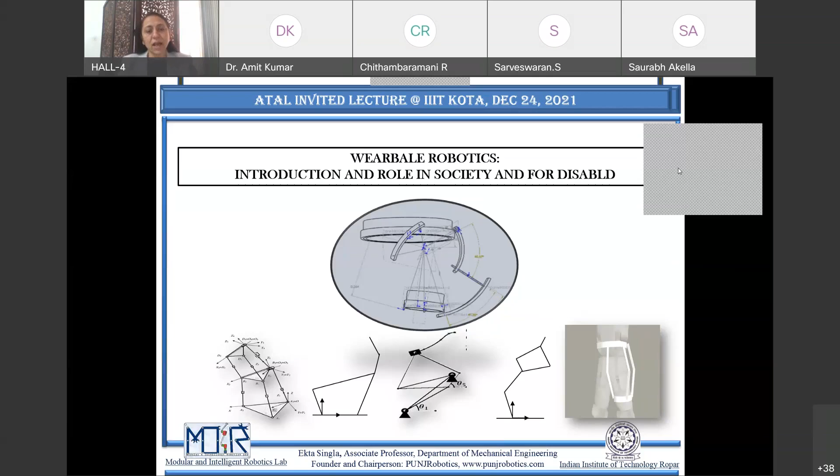I'll be presenting from the mechanical perspective, like mechanisms, etc. Before going into wearable robotics, I'll be introducing how it is helpful, and the different types of exoskeletons, because I'll be speaking about exoskeletons more. Before that, just to introduce my work, so you should see it's not that I work only for this, whatever your expertise is.

yes. Was there any point for me?

I think the organizers can mute or let me know if there is any remark for me. Okay, let me move forward. Yes, Amit Kumar, here. We are trying to manage the audience and will mute if somebody accidentally unmutes. My point is, I always wait because sometimes I think I'm not audible. If there'll be anything missing from my end, I'll wait for Dr. Amit's remark so I know if it's for me. If there's any disturbance, it's all right. I just wait because there's no point moving further if it's not audible.

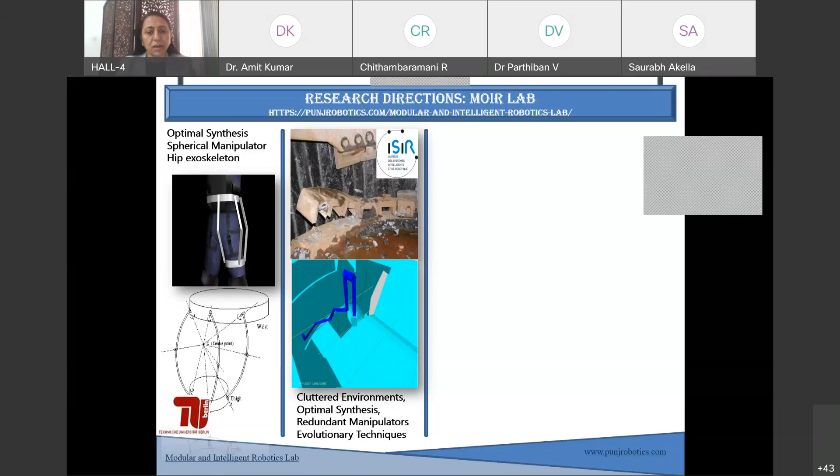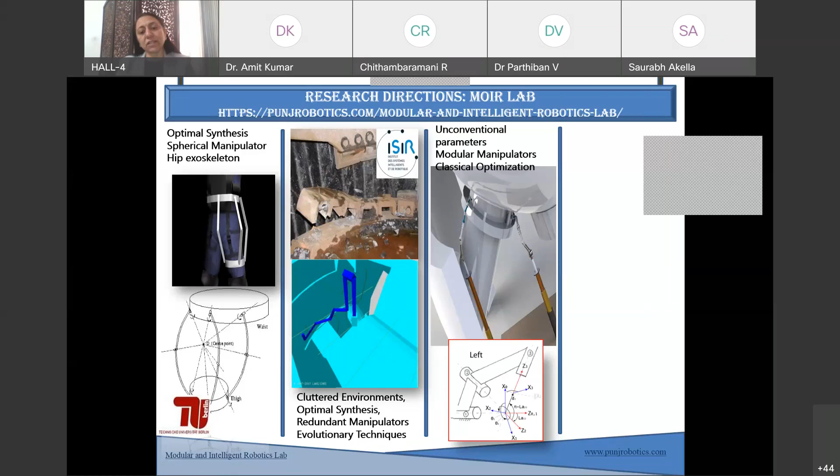And then unconventional parameters - this is in the last decade. One of the major areas of my working is modular robots, meaning modularity is being utilized so that we can give customized robots. There can be development of a modular library, which I'll also talk about in my present lecture. This library we developed has two versions ready for industrial purposes, for maintenance and service robots, etc. So you'll notice that my expertise is related to task-oriented designs, optimal synthesis, collision avoidance, cluttered environments, unconventional parameters, and reconfigurability, or you can say modularity.

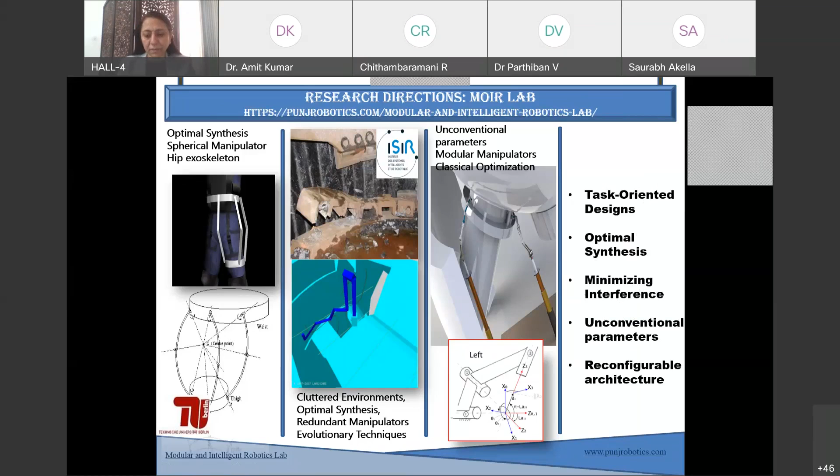These are some pictures from my other works. As I said, one of my major areas in the last decade is modular robots. Those who work with robotic arms understand there are various configurations we work with. If you procure a configuration for a particular type of task once, it won't be cost effective if the work is non-repetitive or just for maintenance - you cannot purchase one robotic system for every new type of application. So we are working on modular designs which can change their configuration.

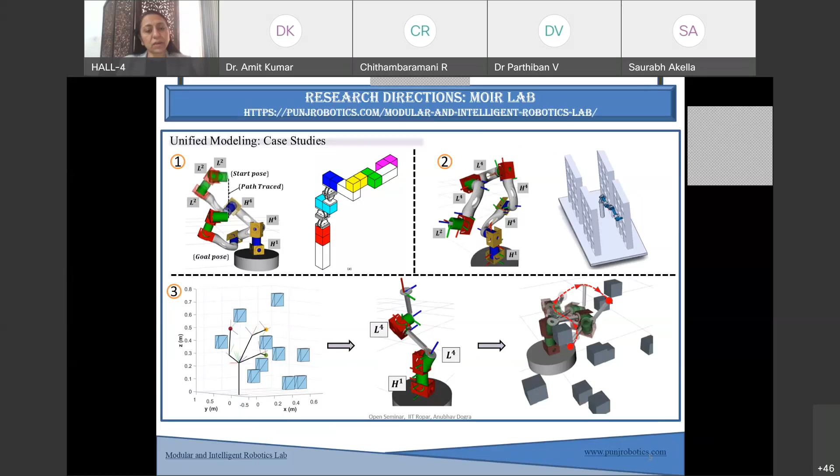So this is just some glimpse of other works. Moir is my lab, which I've mentioned here - it's actually the Modular and Intelligent Robotics lab at IIT Ropar. You'll notice this is the kind of library; this is actually Moir. We call it Mark II - Mark I was prepared earlier, now it's a bit more advanced. Next we have a project for Mark 3, which will be for medical system applications, but this wasn't for application.

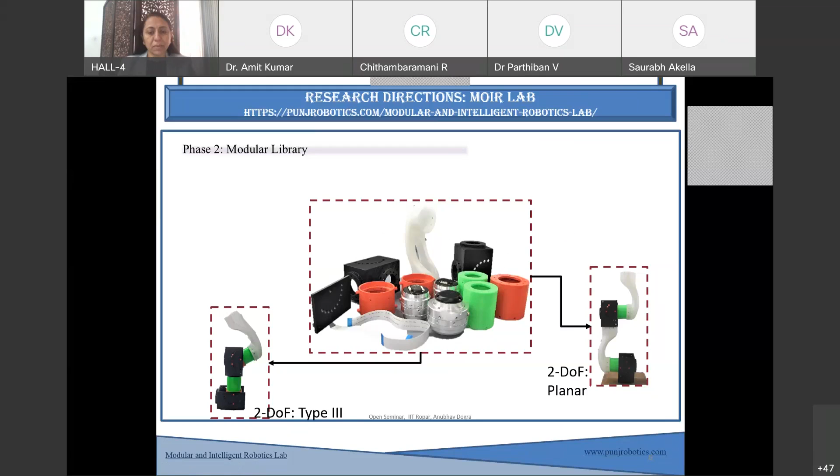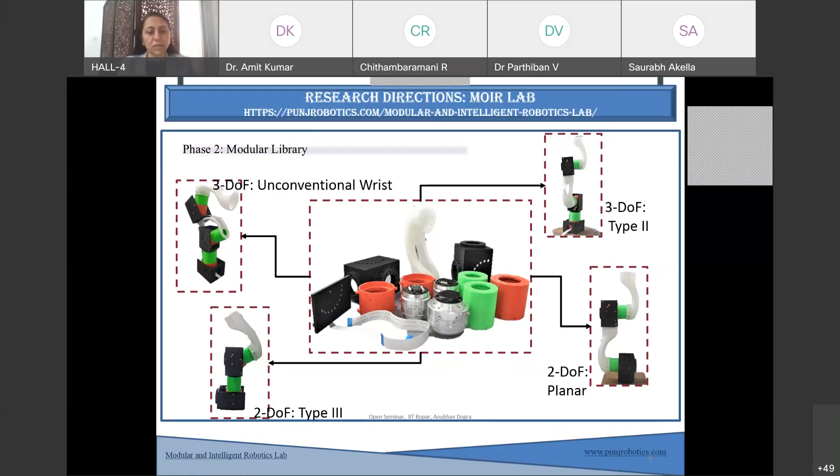This is majorly, as a laboratory concept, about how this library can be used for different configurations and what that means. I'm not making that part of today's lecture, but you'll notice how this new concept has taken its journey. If you want planar robots, or say a twist or a wrist, a spherical system is being developed. Similarly, another spatial configuration - different types of configurations can be developed.

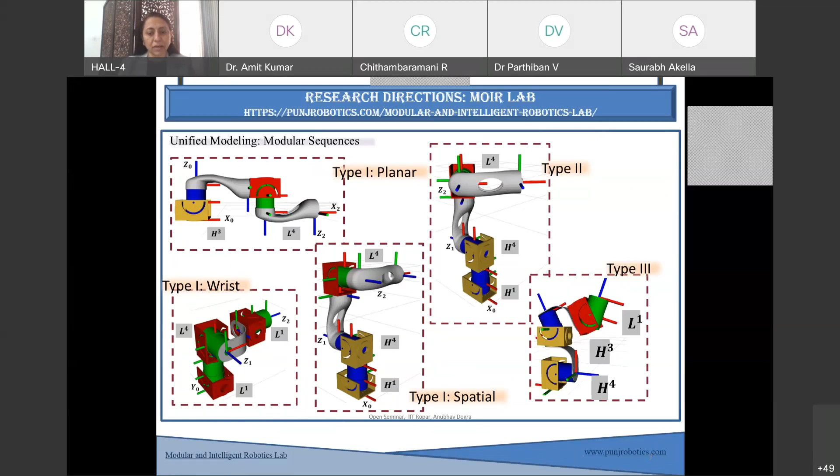So this was all either through simulations or through proof of concept given through the prototype which I showed you, developed in my lab over the last half decade. Now let us start with exoskeletons, because this was just to let you know it's not only about wearable robots, but whatever robotic systems or applications we get, we try to implement our expertise in that. If I may now share with you, this lecture will have two parts.

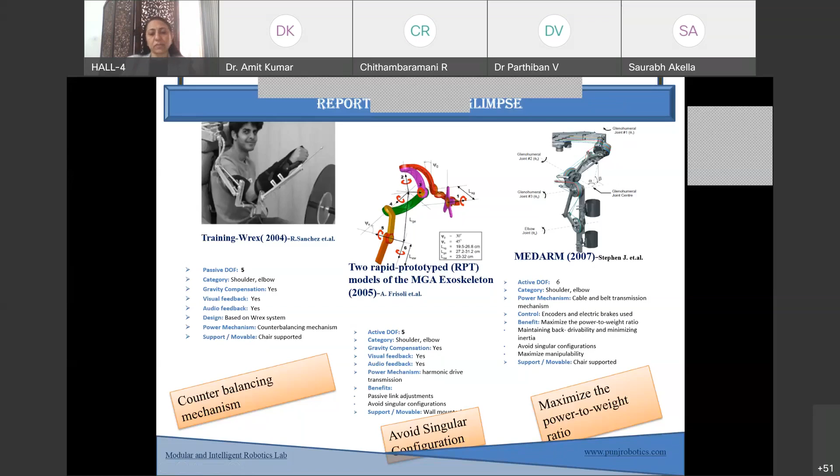So one thing I would like to mention is that if we are working with wearable mechanisms or wearable robotics, one of the major keys to keep in mind - and this is related to any medical device - is how compatible and safe it is to the human skin, to the human body, any part of it. You cannot say this was for the help of the person; rather it's important that it should not be hurting, it should not be the other way around just because your controller was not working correctly or you have not designed it properly. That is why the existence of ergonomics and medical support is important in such kind of work.

So whenever you are starting such wearable devices, you should have in your team one or two associated doctors or some medical teams. You need to be associated with them. This is the first key.

So these are different examples, and from different examples we've got some idea - that was just a glimpse of what other works people have done majorly in the last decade, and from there these were the design challenges we actually worked with. That's why I'm reporting those.

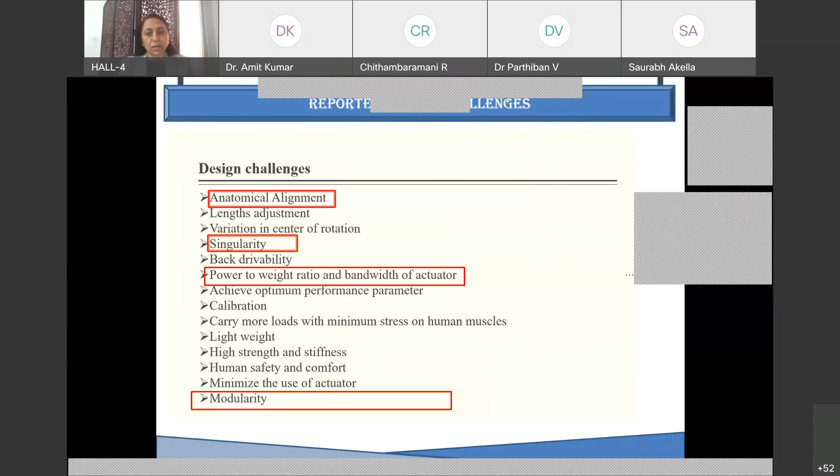So for example, there can be different directions according to your expertise that you can look for. There is enough direction related to sensors, controllers, and majorly actuators - you need lighter but still very accurate actuators. More importantly, you need materials people who will work on biomaterials, particularly compatibility with the human arm and making it lighter. So all these characteristics from different perspectives - everybody's contribution through their expertise will be helpful.

What I work on, as I said, in modular robots, is minimizing or maximizing some specific criteria. These are a few criteria we worked on in the last 3 to 4 years. As I said, I got 2 projects in this direction - one is from DST, which is an international project, I'll talk about it, and the second is from DRDO.

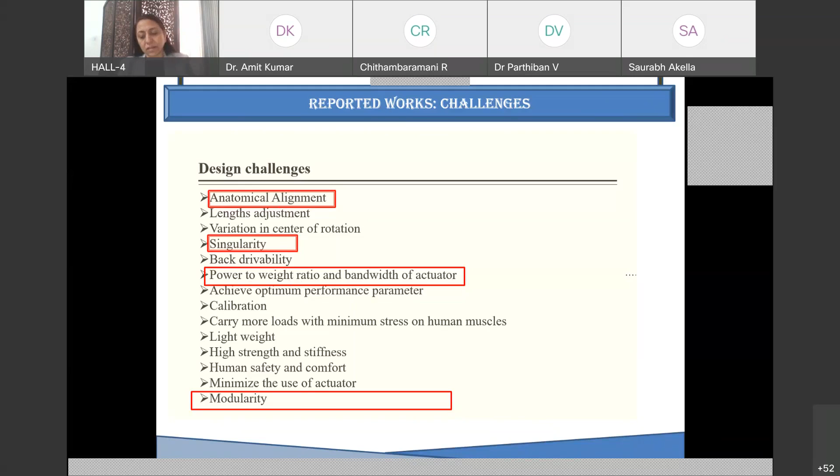So what are powered exoskeletons? Mainly, either you have passive ones for compensation etc., but powered is where you give some external actuation - it's not that only your muscles and spring action will work, it's actually based upon external actuators. Normally here we are talking about electrical actuators - you will hardly use any pneumatic or hydraulic in these cases.

And there are different mechanisms - for example, this is a compliant structure. Why am I showing these things? Because being a mechanical engineer, I know how important it is to design the correct mechanism or structure which will be helpful. These are new directions - I'm showing glimpses of how people are trying to develop different things, may it be for powered arm exoskeletons, legs, or sometimes hands and fingers. Some of these works are actually from Indian scientists.

I normally prefer to see what all groups are working on this. Now I'm just showing you that if you are working in any such mechanism, what do we mean by optimal design. Now I'm taking my first objective, and for example, here I know that I'm working for a particular finger or a particular leg movement.

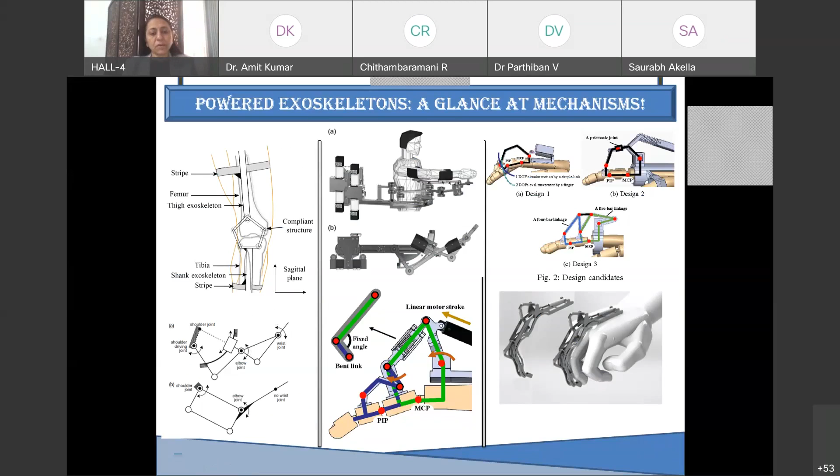So the motion, everything you get from the gait, for example, you get to know that from the gait library, you get some kind of proper human motion data. But what you will do is say this is some points you want to achieve.

So what is the meaning of customized designs or task-based designs which I work with? It is all about knowing which particular configuration I'm trying to use, it can be any configuration. So the first question is which configuration is best suitable for a particular task - the selection of a particular type of robotic system.

The ones which are on the screen are actually very randomly generated, because one of my works, I think started around 2012. It was a PhD student's work, and by 2016-17 it was closed. This was all about randomly generated configurations. They are hybrid in nature.

In robotic systems, you will find that mainly they are serial in nature or parallel robotic manipulators. So if you have hybrid, that means you have serially connected linkages which also have some parallelograms or some kind of closed loops - mainly these are planar mechanisms.

So which configuration is best suited for a task, and also how to design it - because you cannot just say there should be 5 links like this, 1 link like this, 4 links like this. What should be the size of the links, what should be their cross-sectional area, how its kinematics, its statics - everything you need to design.

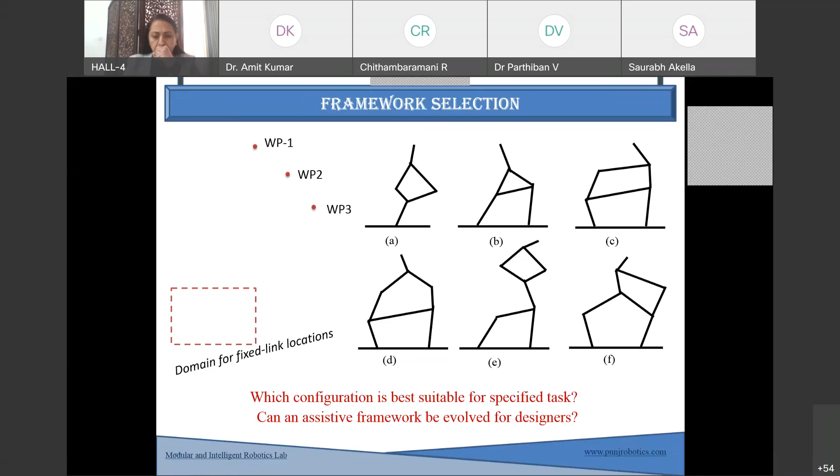So this was just a glimpse of such kind of work from my group - we do not just do random generation, and this random generation I call morphology design. You need to first see that for a particular task, will it be serial, or will it be a parallelogram, sorry, a 4-bar - which configuration will be best suited?

And you can understand that if it will be randomly generated - those who are mechanical engineers here or even otherwise, as an open remark - you can understand that if I give you any model, it's just a randomly generated model. So how do we select which system will be better, and secondly, how to model it mathematically, because if you want to optimize it or use it in some kind of system, you need a mathematical model.

You need to get the kinematic model, the dynamic model - these are important even before controllers are started. You need to have a model of that particular system. So how to develop the system model?

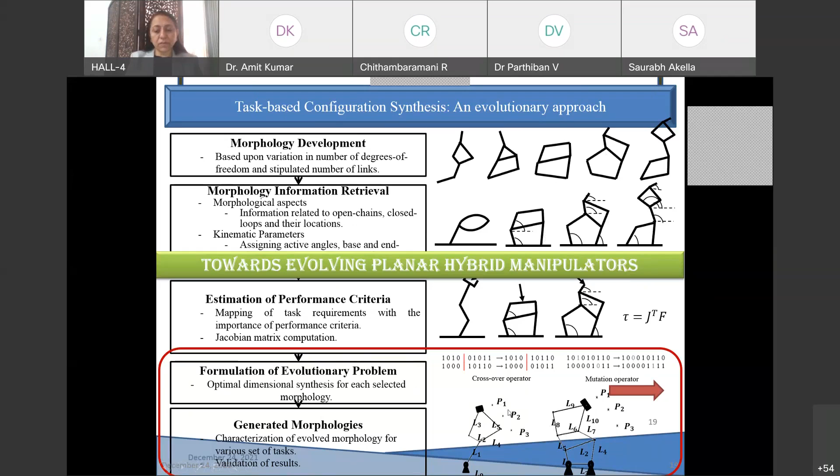We had developed a generalized modeling system such that if you give me any randomly generated system, its model will be generated automatically, and then we optimize it for a particular task - like if you want it to follow a particular trajectory, I'll speak about that.

For example, these are not just points - these are 3 or 4 points you can have from human data. I'll show you some case studies in which what I'm speaking about has been utilized. So say WP1 - that is working point first, second, and third.

So if these are your working points and you want this particular system, which is being shown as a 4-bar mechanism having one extra link which can rotate here - this is the mechanism. And we have a modular system.

I'm not getting into the details of all that, but this is also one of the modular systems. This is one module, this is a second, or you can have a 5-bar module. So this loop has 5 bars - if it is 5-bar, it has its different properties; if it is 4-bar, it has its own.

So how to make these models, and then have the end effectors reach these work locations - for example, this point you want to reach.

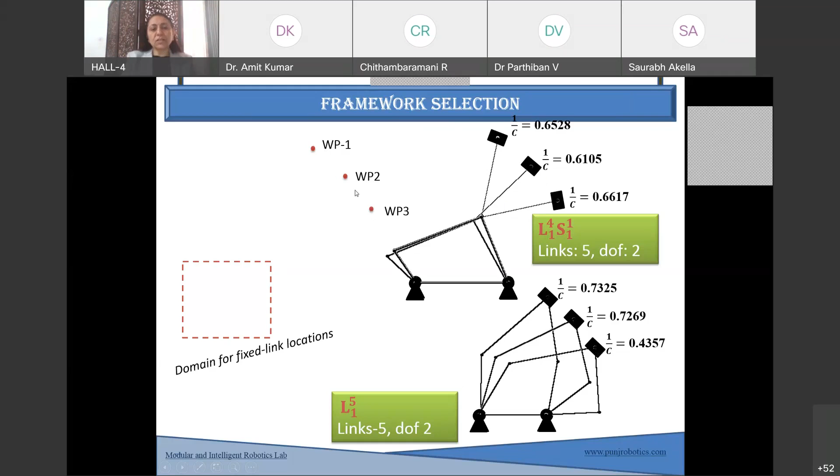This is the meaning of task-based designs. We make a model and try to reach the required data which we take from the human data. For example, once developed, the links are settled, and this particular configuration, our S1L2 configuration, has serial link 1 and then link 2, where we talk about the second link being a 4-bar mechanism. This configuration reaches these 3 points, and there's another criteria which tells about its performance.

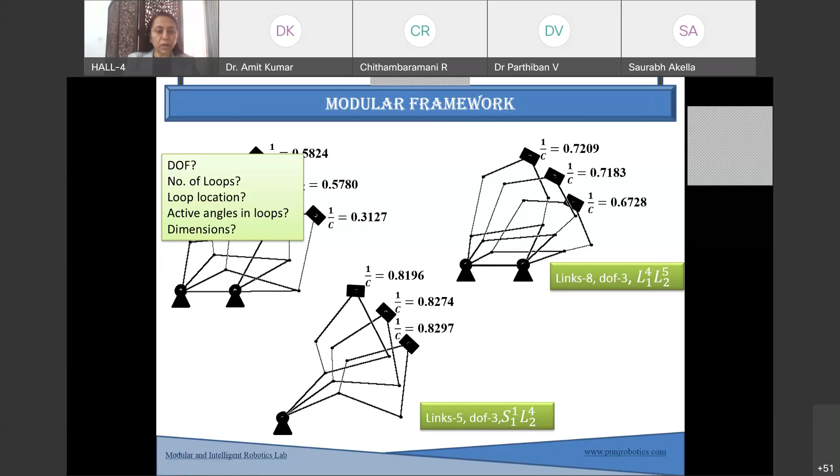So we work with how many degrees of freedom, how many loops, where the loops are located, everything in that work is part of this design, giving the basic framework for that exoskeleton to start with. Once the basic frame is ready, the designers do the detailing, and of course the people into controllers, there are separate teams who work on how to actuate it, how to select an actuator. But the first thing is about the framework.

So this was all framework, and if I just give you the overall working strategy, you can always fit yourself in to see which direction you are working. For example, in Wearable, before we design for a particular system, this was a work - this student is just closing up, it was started in '16.

Basically, if you take some data, we have EMG sensors, a myometer. We give angles of different positions, get the geometric information, and get information from the sensors regarding muscle strengths, etc. This is what I'm talking about as the human data.

Once you have the human data ready, from there you get what the muscle strengths are, at what location, which angle, and whether there was a weakness or not. From this information you see at which posture how much strength will be required. That means if the strength is less, external help is required if it's weak. And if the person's arm is weak, you determine how much external torque will be required.

So both the location and the muscle strength data are first taken, and after data collection, which also involves some kind of cameras, we study the different postures and different rehabilitation exercises - I'll talk about this later.

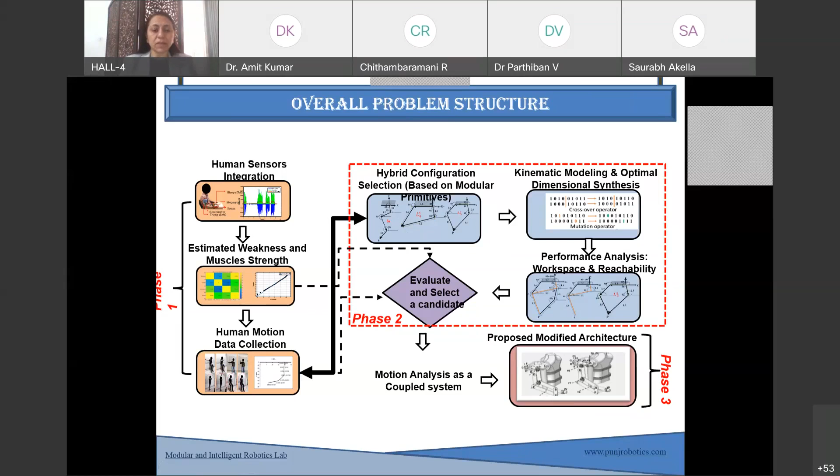And while doing this, we got some practical applications, meaning some of the work that was required for certain projects. I'll show you those so you get the idea, because whatever I was speaking was from the research perspective, and sometimes you don't get to know what is exactly the meaning.

So this was one of the papers, I think from '21, we got in Journal of Mechanical Design. Here you'll notice examples - for instance, this is the 5-bar linkage, and now this linkage has to be designed for reaching this human data.

Say this is the data we had collected, that it has to reach all these locations - you want a human arm to reach all these locations. A human arm will reach, for example, it's a fixed shoulder point - you consider that to be fixed, though actually it is moving.

So there were questions about where we are connecting it to the human joint - even if that is moving, what is the effect here? Certainly there'll be an effect, and as I said, we are assuming it to be fixed. So we keep doing such analysis - if there is a motion here, what will be the effect at the end effector? But first, if our end effector is reaching its target, what should be these lengths?

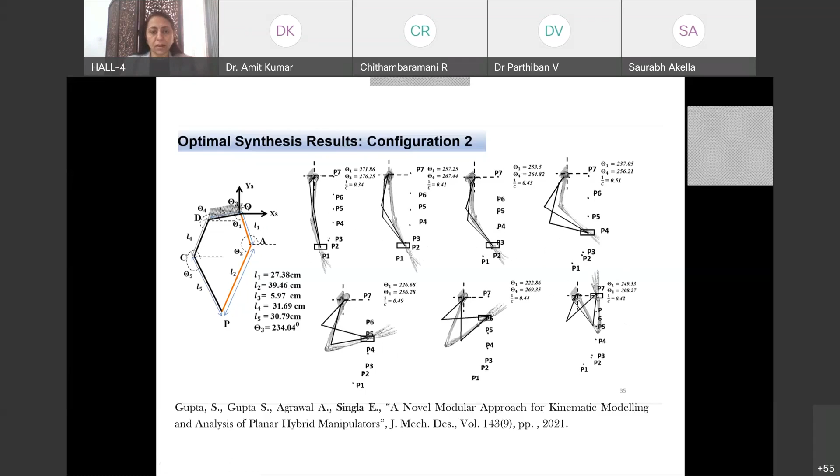What should be these 5 lengths, so that with good performance, your last point reaches where you wanted it to be. This has been shown, how it's P2, then next point. If it is reachable to all points, you take this frame and try to develop or design it further for detailing, and then only someone will start on actuator selection or feedback controller design.

Another important aspect related to customized design, another key thing when you work on wearable devices, is to avoid any type of misalignment. In fact, we have a very recent work showing through simulations what misalignment is, but I cannot add it here. Many things I'm showing you are from reported works of others, because our papers are still in process.

So that is why I could not show those exact simulations. But misalignment is very straightforward: the human arm has a particular flexibility at its shoulder or at its elbow joint. But your exoskeletons have just one revolute joint here, because the way we design is that the exoskeleton has one joint here, one joint here. But is it really in alignment with human motion? Normally not, because even if you try to make the axis aligned, it will not remain aligned. Your human arm does not have a fixed axis; its joints are moving. So you have to make some compliant structures at your joints. This is a very important direction we are working in, how to avoid misalignment.

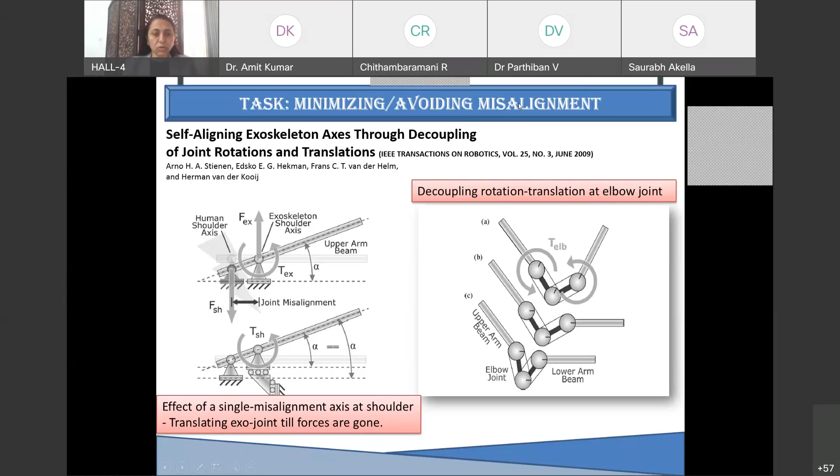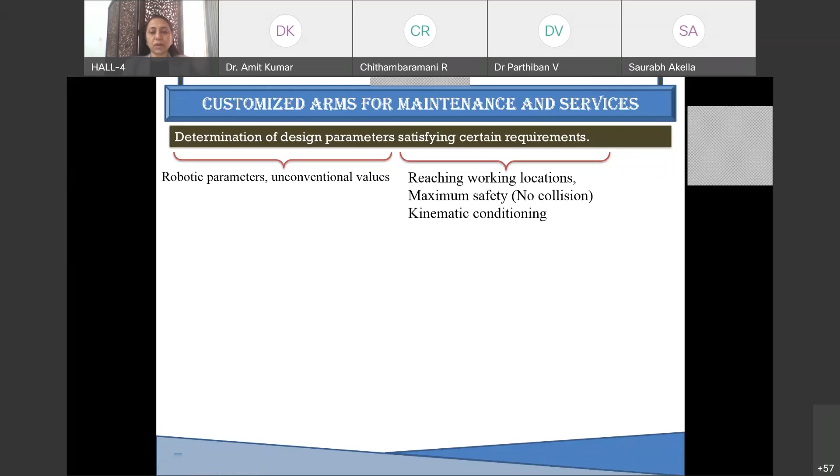This is also another key for anyone to understand. For any type of customized work, you need to look for what parameters are in your hands, how many different parameters you want to work with, and what the objectives are, because this is how we model our customized robotic systems, by answering two questions: first, what are your design parameters in your hands, and second, what are the requirements, that is your objectives, which come from the data we collect from human motion, may it be about locations.

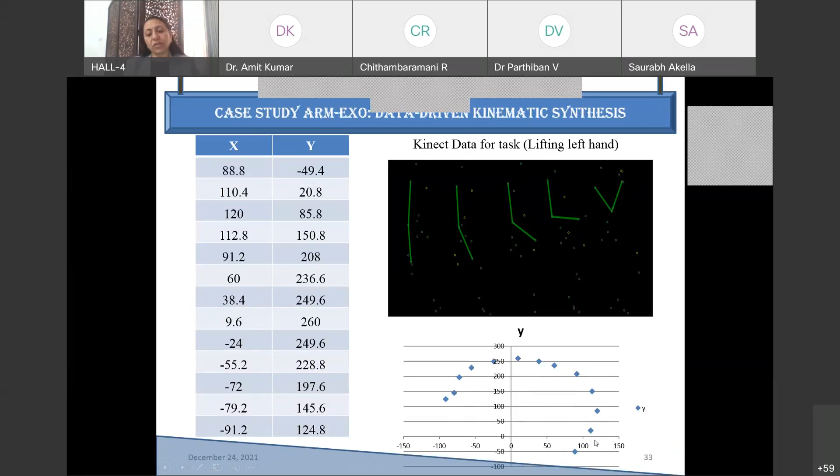So this data, if you just want some particular robotic system to follow this data, you will define your problem with that. This is actually for a sit-to-stand mechanism. This data has been taken from a person's hip, showing how the hip joint moves if a person is sitting up, from sit to stand motion.

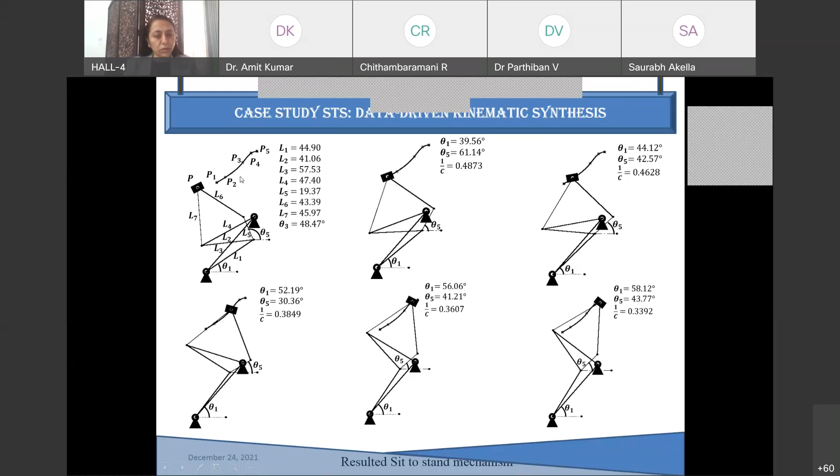So from there, if you take the data and want this particular system to follow it, you know why? I'll just show you some pictures first, this video first.

Rather than one degree of freedom, this could be two degrees of freedom, or even a single degree of freedom system which helps in a smoother sit-to-stand trajectory. The key here is human - you are following the natural human motion. So if we are emulating the natural human motion, it will be more aligned to human motion and the human will not get any jerk.

If you design like that, this is the idea, or the meaning of what I was trying to tell till now regarding customized design or task-based design. This is data driven, because you have taken the data from the human itself, and then you are developing the robotic system or mechanism which follows that particular data.

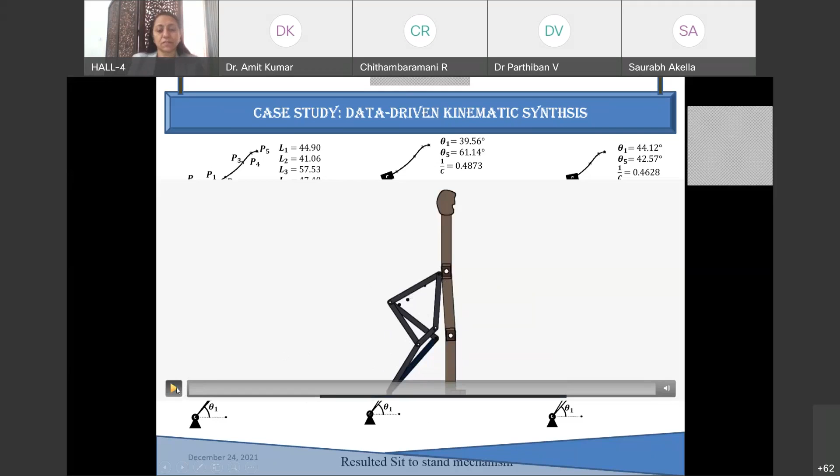But this is the first step for the designer. So for doing this, this is the point which we had taken from the actual human motion.

For example, here, in fact these two slides are coming in the wrong orientation, so this I should keep first. This is actually data driven kinematic synthesis of this particular mechanism. So this is the data which I was showing you, and this is the human leg.

So if it is getting up, from here to here, it has taken some particular sit-to-stand motion. Then from sitting to stand, the hip joint is moving through this trajectory. And we can take not just one, but hundreds of such very refined human motions.

Then we try to see how our exoskeleton - or rather, this is not exoskeleton, here it is talking about the kinematic synthesis of any assistive device - so if this is an assistive device, this is again in the Journal of Mechanical Engineering Sciences, IMechE, the proceedings coming from IMechE Part C.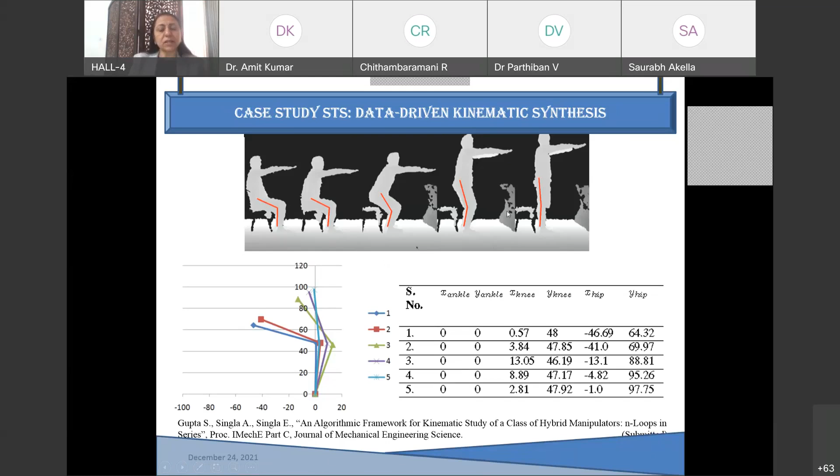It was published around a few days back. It's written as submitted here, but it has come out there. So basically this is being shown, that once we have taken the data, how it is being utilized to develop the mechanism.

Similarly, we have worked on different other mechanisms, and I'll show you a glimpse through this picture, which is a crude simulation. If you take the data for a human arm, see, this part is not aligned to the elbow. This is called an end effector mechanism, because only the end effector is lifting. It's similar to holding a person at the shoulder and using your second hand to help lift them.

So if the exoskeleton is holding it like that, rather than calling it exoskeleton, they normally refer to those with exactly the same axis, for example exactly similar to the elbow. So the definitions are changing. This is the end effector version, in which it holds at the last point and helps to lift. But it will only do this if it's designed to, right? Its kinematic structure should be designed to reach all the points it needs to reach.

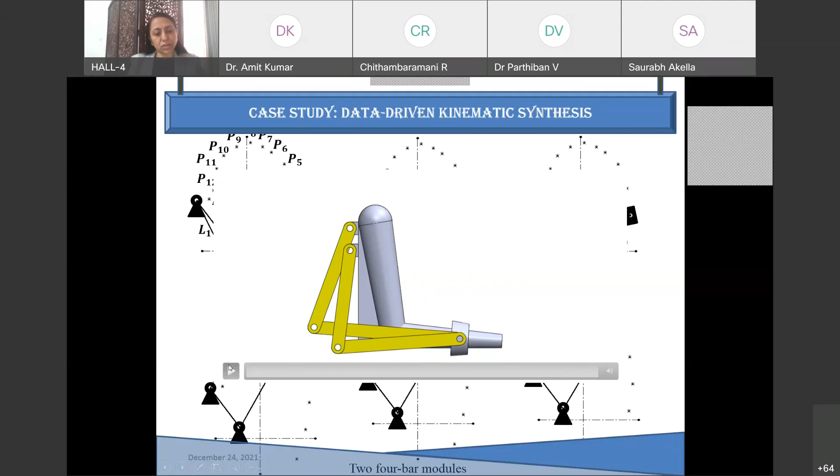Now let's take this next example. This is work which I did, although for spatial systems, also related to synthesis and design. This work I did actually in 2005 when I was in Berlin for a specific job, and there I found they wanted us to work on this. My professor's team at that time, I was a PhD student, and we studied a lot about exoskeletons because it was a very new concept, even for what I knew.

It was a good work. I wanted to show you how a specific mechanism works, not about planar systems which I was showing you before. This is a spherical system with 9 degrees of freedom, but only 3 are active, rest are passive. This is the hip joint, so you would design a new joint here. If somebody's hip joint is weak, you can wear a particular system which has a spherical motion.

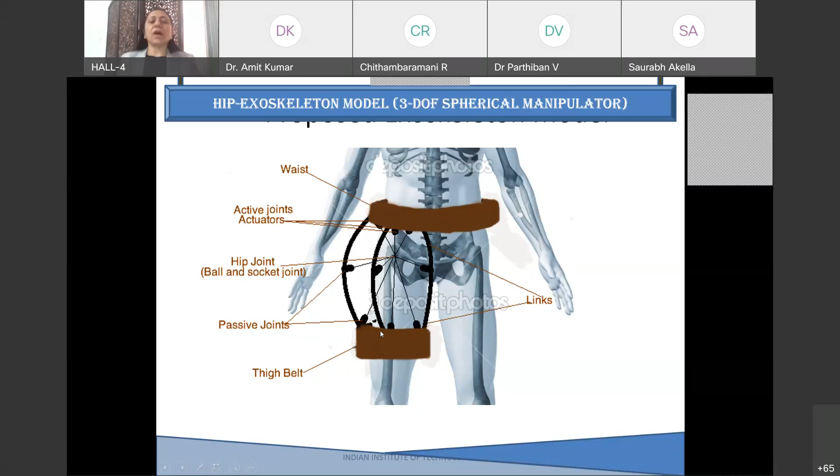By connecting it, the person wears a system with a belt over the waist and another harness connecting to the thigh, and this is the basic framework. As I said, it won't finally look like this, but some of the active and passive joints give it motion equivalent to the hip joint motion, because hip joint motion is like a ball and socket joint. The spherical mechanism gives you this motion, but the key is the constraints, how to design it, where the actuator location should be, and the location of the other passive joints. All this becomes part of the designer's work. This is what we did in that particular work.

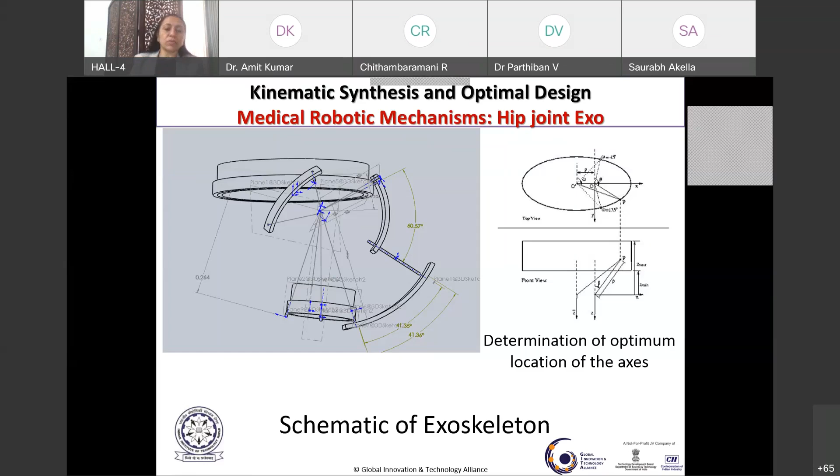You have to make the model, write the kinematic models, and analyze them. This is what people do in this field. If you're interested in theory of machines, mechanical systems or mechanisms, this is a direction for you, and you can always implement it in applications like assistive devices or rehabilitation devices, utilizing your expertise. This is what I wanted to show you.

Similarly, one of our other works, because all these things are big team efforts, it's not that I or just one student is working alone. We worked with a different team from CSIR Chandigarh, and this paper came very recently, though we've done 2 or 3 articles together. This particular work was from around 2015-16, and you'll see there is a mechanical system involved.

This is an assistive device expected to have 2 versions. One is for the master, which will be used by the doctor, and whatever the doctor is doing, the slave part will follow it. So it's a master-slave system.

I cannot show the video again here because it was not completely my team's work. Whenever we work with government organizations, it's important to keep whatever understandings are signed. But if somebody is interested, it is there in the papers.

You will notice that one of its links was this. This is again an assistive device helping a particular task - this is a master-slave robotic assistance for doctors, not only for one type of work, but for any.

Our human arm has 7 degrees of freedom. That is why this particular system has also been given 7, so that whatever a human arm is expected to do can at least be transferred to this system. It's not that it has constraints, because if your arm has 7, that means a human body or arm is using its 7 degrees of freedom to work for a particular task.

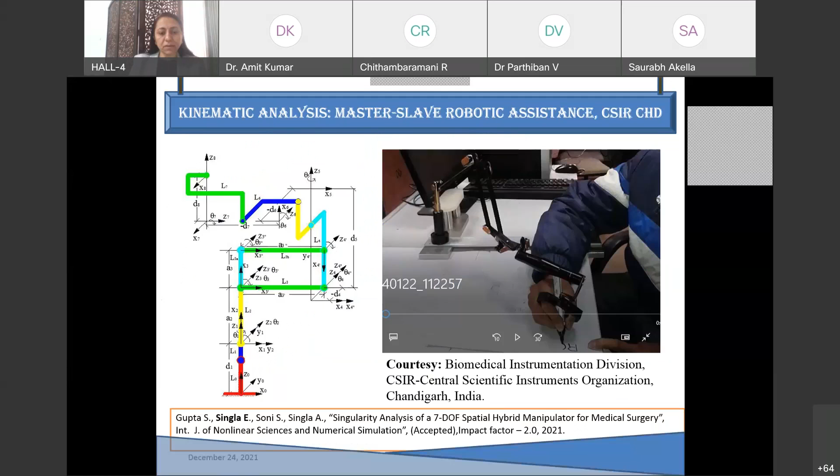This is again for the same system being designed - this is the simulation for that. We also do a lot of workspace analysis and kinematic analysis. This was published in a different journal article, showing how this 7 degree of freedom system was designed for medical surgery, and how we did the kinematic modeling of it.

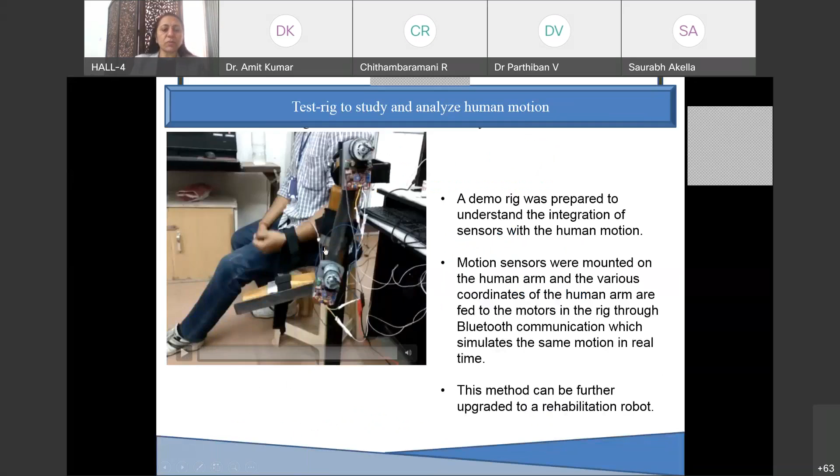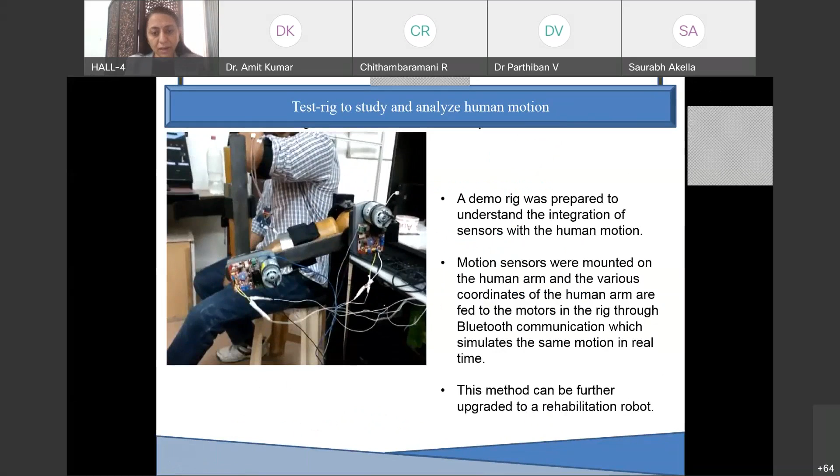Of course we cannot show much of their work, but yes, very initially, whenever we start with some test rigs, we had seen okay, something which we had tried. The final versions I've never put as a demo here yet - once the reports are done, only then will I add them to my presentation. But yes, the final versions have come out very well, with an arm exoskeleton. This is just a glimpse of all the work done during this project.

For example, you should have a back system which should be enough supporting. You can always use some kind of closed loops, or passive joints, so that they can support your arm.

Where it should be attached at the shoulder, should it come from the back? All these things you design or try to see from human comfort, designing the actuators, taking the human data, making the path planning, motion planning, etc. This was mentioned for eating, but for any task or rehabilitation task, how to design this particular part, what should be the geometrical features, what should be the other features. So this was all majorly what we do.

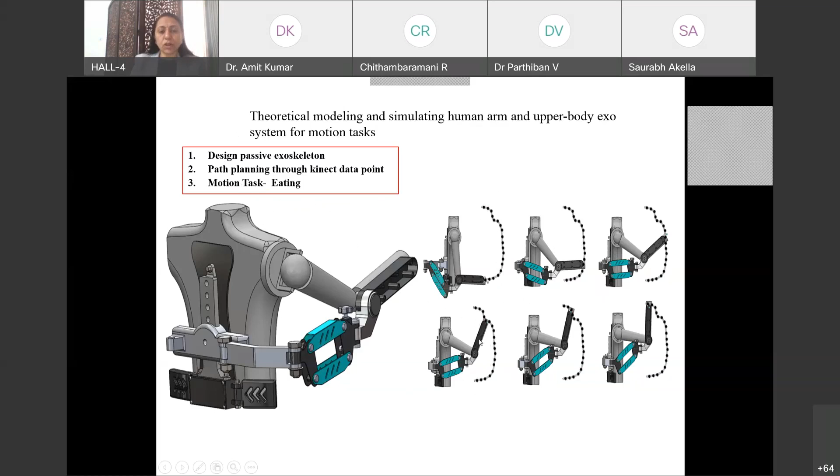Again, just because these are crude things, normally when students work with us, many interns come, and some interns work well, and these are all simulations coming from their works. But what is there in the papers, I do not show much here. I prefer that if you are interested, you can look at the articles connected to such things and read them. But here I normally show the simulations which I collect from the initial works.

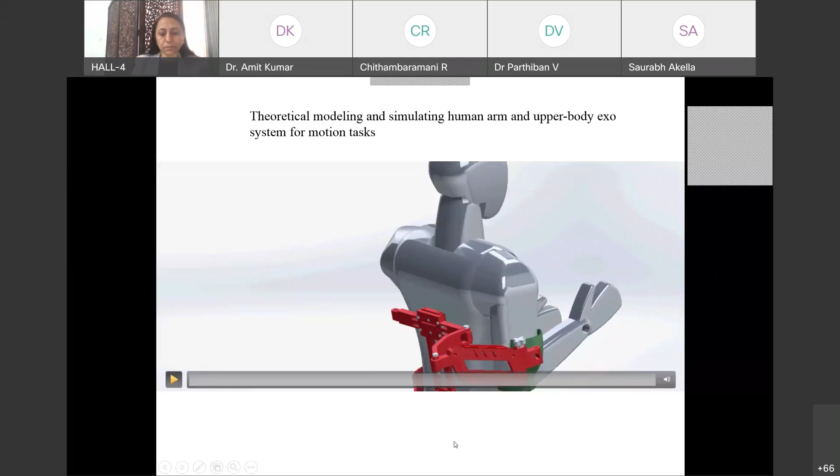This is important because we had also worked in association with the Rehabilitation Center, New Delhi, the national center. Because unless you keep in association with, for example, PGI doctors, or this rehabilitation center, because we were working with them - I met the head of the center in some conference, and it was very helpful that they let us know what are all the rehabilitation exercises.

So if we are studying the exercises, then based upon the exercise, because normally the rehabilitation is done by a helper, or people trained to get the rehabilitation exercises done for a weak person, or a person who has got some neurological problem or some health issue, they know how to start, how much to help, which exercise is important. But there you need the expertise, and they also see whether they should really help, or whether the person should do it himself or herself.

So this kind of information is being grabbed, and in our very recent papers, which are not yet in the process of publication, we have given this particular work, how we have studied the data given by rehabilitation exercises and their expertise.

And then this was actually, basically what are the different - I am also using my modular primitives, because earlier I showed you the modular library which is developed, that is at a better stage, for the industrial or maintenance tasks, for the service tasks. But now this is mainly we were trying to give similar primitives, or modular links, which can be used for customized designs of the exoskeletons.

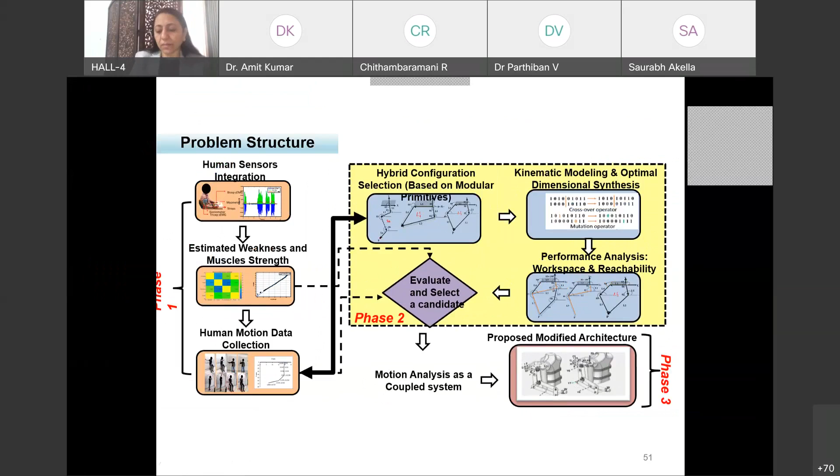And this is how we show that our major contribution in that direction will be how to model these things, how to select, and for a given, say, a human - there is a person with 40 years age, male, and he has his own trajectory, human motion. And then there is another person, because we have done this for a particular age group, not children as well as old age, not everybody, but for a particular group also there are variations.

And if there are variations, at least you design for a particular person, and accordingly it will be 3D printed, because nowadays technology has increased. You need not make the links a priori. You should have a modular library in software, and that will be used for constructing or fabricating a robotic exoskeleton. Once the exoskeleton is customized for a particular person, it can be fabricated. This is what we are doing very recently, because I was telling you how we have evolved towards this direction.

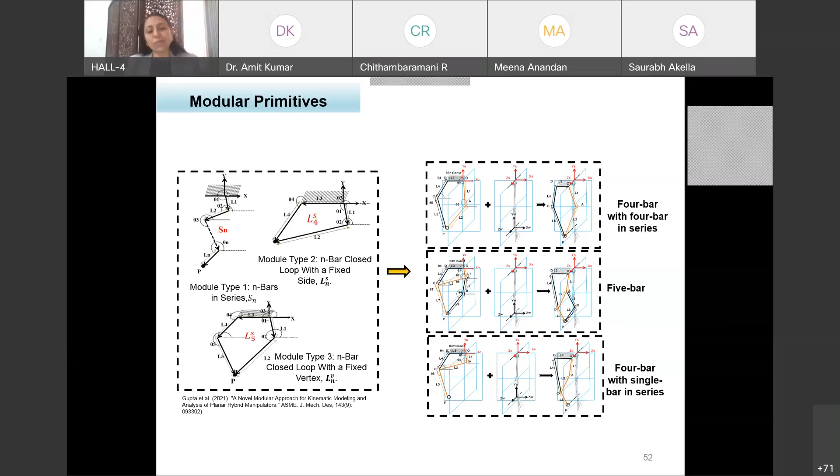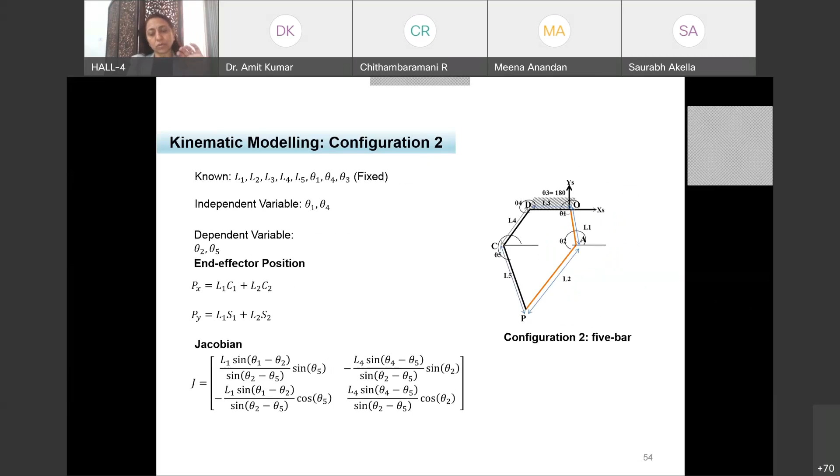So for example, this is the configuration. I'm not showing details of it, like what type of modeling we do, because this is associated with a very small group of mechanical engineers. Similarly, another configuration, say somebody wants a 5 bar, so different modules are developed. The same modules are developed in the program or code. Whenever somebody wants to model it, it will be modeled modularly through modular programming. So I think the concept of modularity can be taken away today as one of your learnings, but how it can be used in your system, that you can always see. If you are working on controllers also, it is important how you code them so that for different applications you can actually use them.

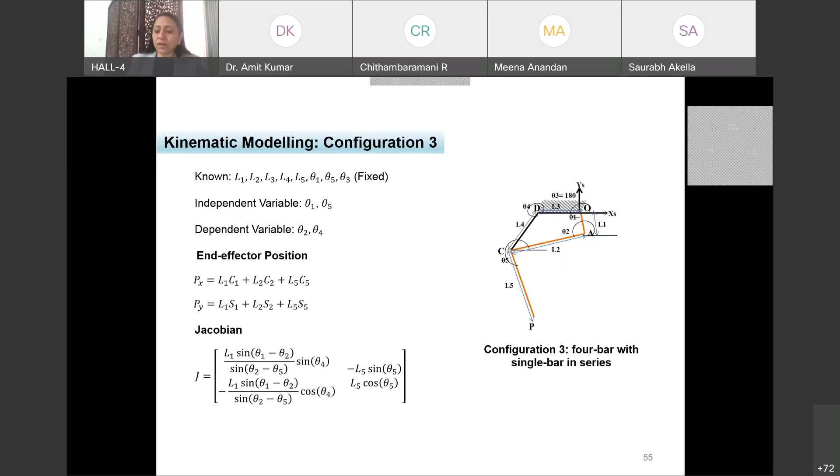So this is quickly, I'll also talk about my very recent work from DRDO. It was related to a leg exoskeleton. I can just show you this glimpse, which was fabricated at DRDO lab Bangalore, because this was allowed to be shared, but not the details.

So what was our job again? We had an exoskeleton already built based upon some design, but they wanted our team to first make a proper model and then analyze where it was going wrong, because they had told us that when wearing it, they had done it to a very good extent for the soldiers. So it was not really for the health of the unhealthy, it was actually for very healthy soldiers, just to help them in walking or in different terrains.

But at present they had worked only for plain terrain, and the entire objective was to reduce their effort, so that they should not get tired while walking.

Similarly, you can help soldiers carry loads using the full exoskeleton, as you might have studied in the very beginning. These days there are different robotic systems being used for defense, and similarly exoskeletons are being used for healthy workers also. It's not only about rehabilitation systems or for the unhealthy or disabled, but also for workers, so that if someone can afford it, it can help them lift double, triple, or 5 times the payload they could otherwise lift through manual action with only their muscles. But if they use the exoskeleton, they can actually work differently.

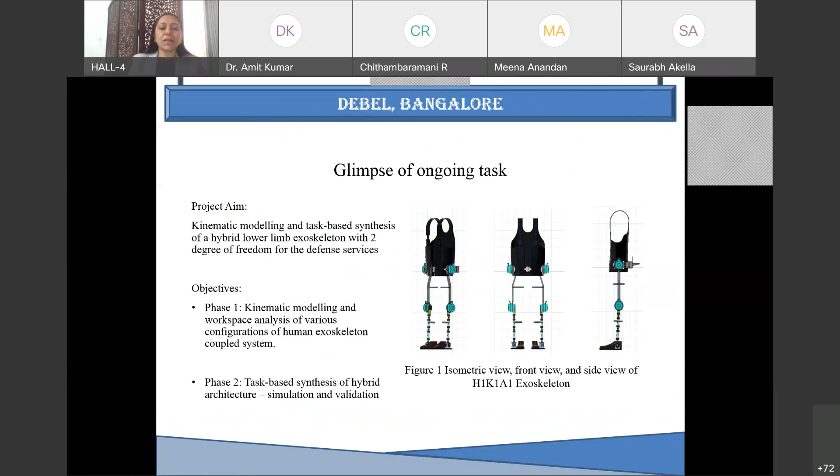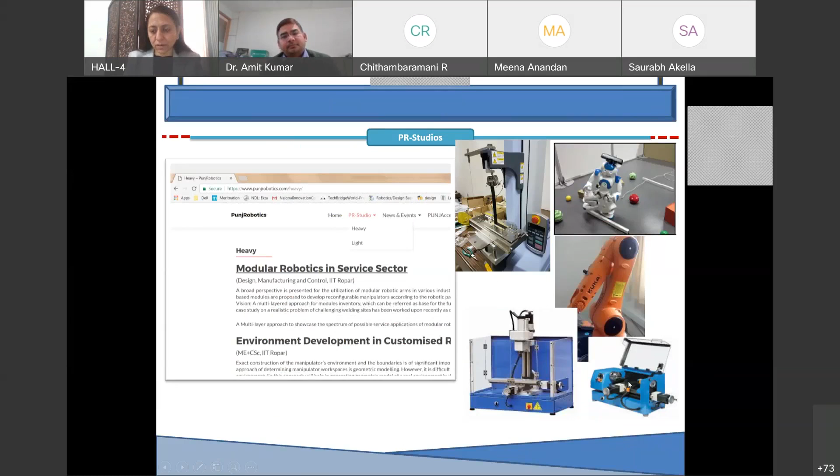These are some glimpses about the project status, some Punj Robotics. These are the members. We have some kind of PR studios - Punj Robotics is PR. We have humanoid industrial robotic systems, some very sensitive UTM which is helpful for medical devices, smaller in size, etc. And some of the machines which we have bought.

Second thing is, please join the Robotics Society. I don't know how many of you are part of Robotics Society, but if you are, nice. If you are not, try to join the Robotics Society of India, because when you meet, you will find what other Indian researchers are doing, and they can help you rather than only writing in conference or journal articles.

You should meet in the national conferences, and it is very good because the Robotics Society, earlier its name was Robotics Society of India. The Advances in Robotics conference is run by the Robotics Society, organized every second year, alternate year, biennial - Advances in Robotics.

Advances in Robotics 2021 was in IIT Kanpur, and 2019 was in Madras. Now the next one in 2023 is being discussed for IIT Ropar, and I feel by the time we should be over from this pandemic, we should be able to really invite you all. Please keep an eye on the announcement of AIR, Advances in Robotics 2023. I haven't written anything about it yet, I should prepare a slide now because the time is coming. It is in IIT Ropar, and I wish it will actually be with everybody's presence rather than in hybrid mode - we'll keep it hybrid because that will help us have more international connection for all of you.

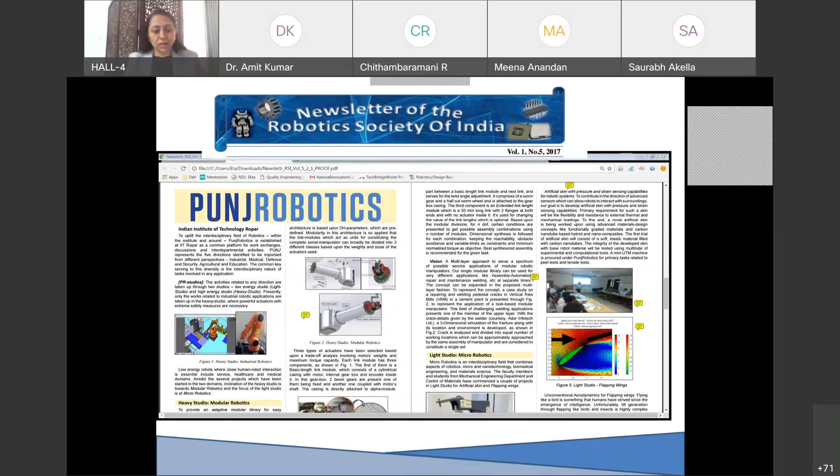Thank you so much, ma'am. Participants, if you have any questions, please ask. There is something in the chat. Okay, it's about attendance, Professor. Okay, hello ma'am, good afternoon.

Ma'am, for prediction tasks, how to collect the data from the robotics? From the robotics or from the human? Robotics data. Okay, that is all related to the sensors. Certainly, as you know, my particular research work is not in sensors, but you use all types of different sensors, starting from encoders to myometer. If it is about human data, mainly in exoskeletons, people are worried about it.

We have a biometrics complete data kit which has a goniometer, a myometer, etc., which helps us take human data even while you are running experiments, giving you the torque and forces at different muscles. I also suggest some specific software, OpenSim and Anybody, which help give data regarding the human system.